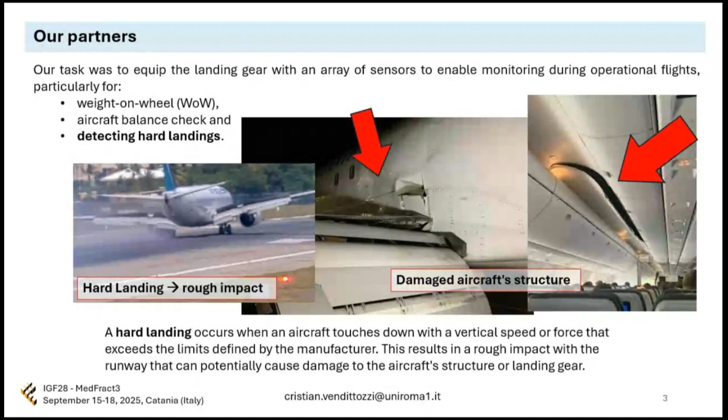The problem is that to date, there is no integrated avionic component that is capable of objectively monitoring whether a hard landing occurs or not. Usually, a company relies on the report delivered by the pilot, but at the same time, 90% of hard landings occur due to the wrong behavior of the pilot itself, so it can't be an objective relay.

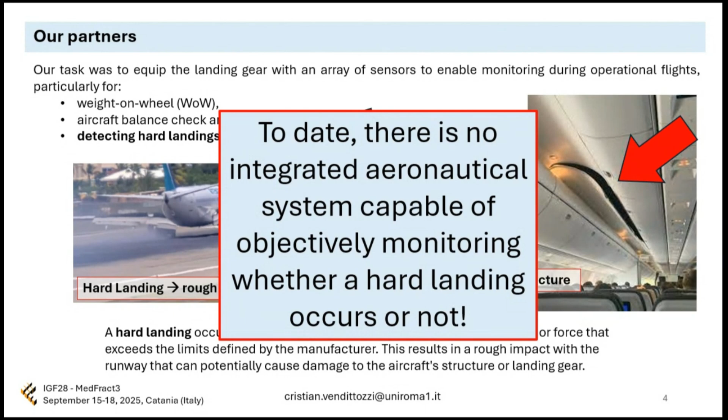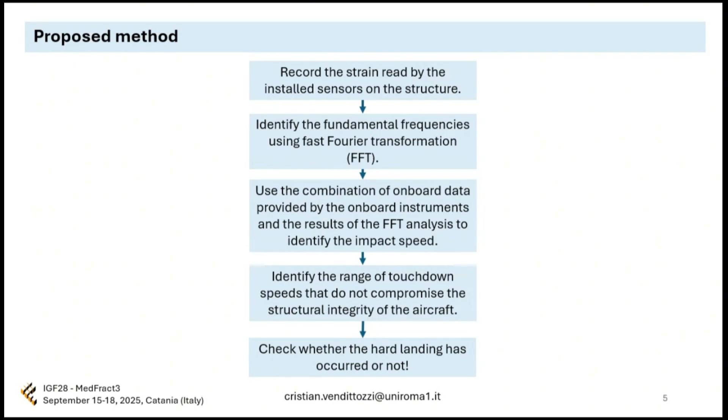This is the proposed method. The idea is to record the strain read by an installed set of sensors to identify the fundamental frequency by FFT, the fast Fourier transformation, use the combination of the onboard data provided by the avionics of the airplane or the helicopter, combine it with the results of the FFT analysis to identify the impact speed. Identify then the range of touchdown speeds that do not compromise the structural integrity of the aircraft, and then check whether the hard landing has occurred or not.

The second partner is the Corpo Nazionale dei Vigili del Fuoco. It means the national fire department. The test was performed in Ciampino Airport with the team of Daniele Tittoni.

Let me say that they participated in the project, giving us the chance to use the Sikorsky S-64. This helicopter is called S-64 because it entered operation in 1964. So it's a 60s design, a very old helicopter. The avionics, the onboard equipment, were renewed in the last few years, so the electronics are new, but the structure is a very old structure, an old concept. It was chosen just because, as you can see, it is a very distinctive structure, and it highlights the main landing gear, which is the component that we are going to test.

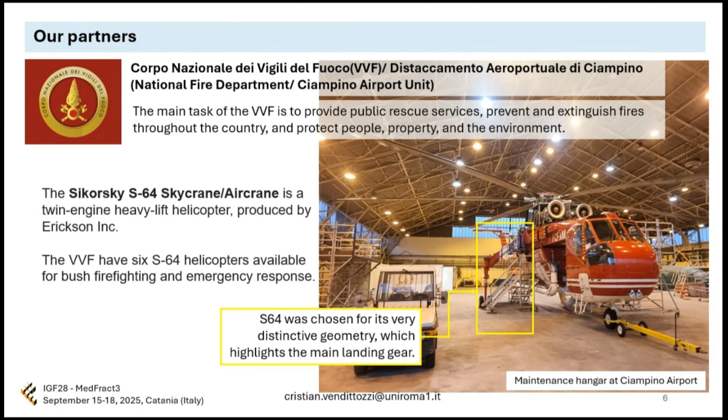What is our goal? Our objective is to verify what has already been proven in the lab works also on a real aircraft, a real helicopter, because we have performed in the last few years several tests on, let's say, a bench test in laboratory. The scope is to stress the full chain. The chain starts from the sensor, cabling, the interrogator, the data acquisition system, the processing, and the interpretation of the data under real operating conditions, okay?

What is our success? Our success is a successful flight, or better, to show that we can use our system during a real flight, capture usable signals, be capable of using the signals, and show plots that convince our partner the system is viable and worth continuing.

What does it mean, convince our partner? The Vigili del Fuoco are lending us a system, a helicopter, that has an average cost of more or less 20,000 euros per hour of operation. So each hour, they spend 20,000 euros. This is the reason why it's very hard to convince them. So this is a feasibility and transfer test, not a performance limit test. We are not looking at a number, okay?

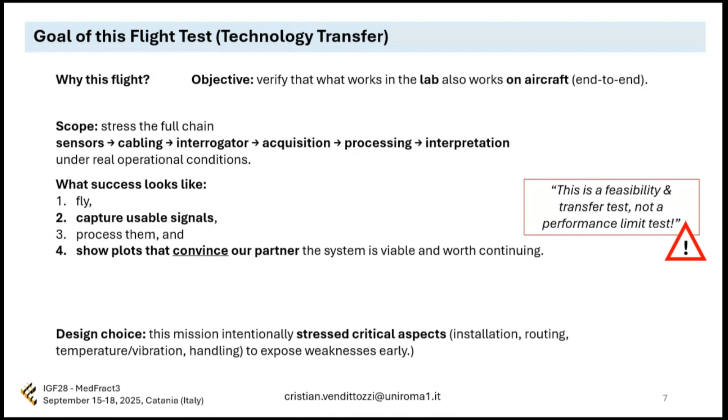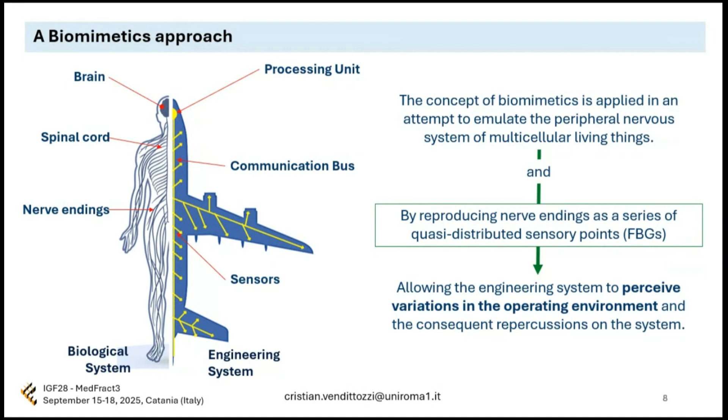There's an overall structure idea that is a biomimetic idea. Biomimetic is the attempt to emulate biological behavior. In this case, the concept of biomimetics is applied in an attempt to emulate the peripheral nervous system of multicellular living things. It means our plane, our aircraft, our helicopter must be thought of as the human body. The nerve endings must be the sensor, the spinal cord the communication bus, and then the brain the processing unit. It seems to us that the best sensor that fits this purpose are the fiber Bragg gratings.

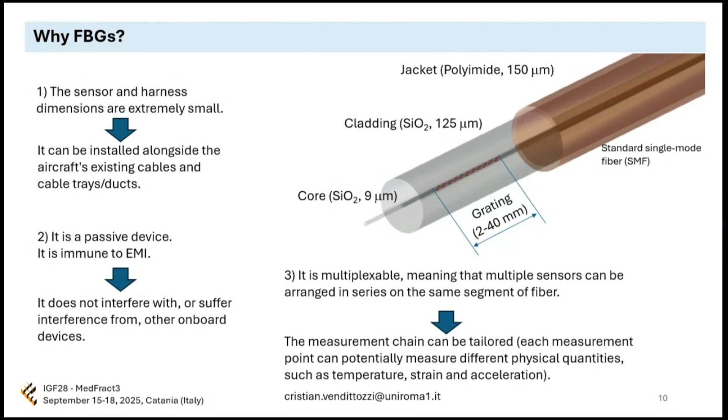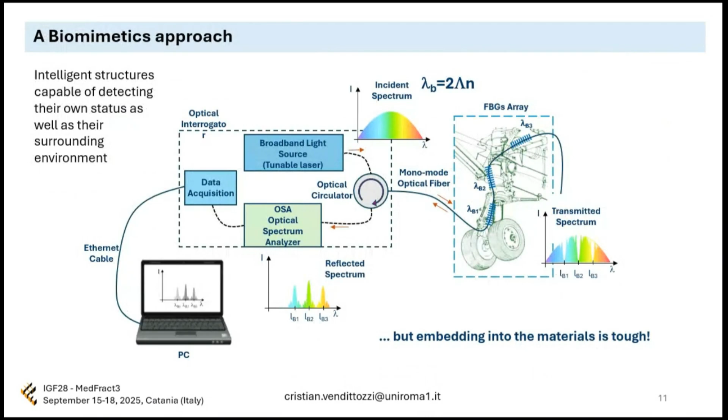The third point is the multiplexability. It means we can put many sensors on the same sensor chain. The measurement chain can be tailored, and each measurement point can potentially measure different physical quantities, such as temperature, strain, and acceleration. On the same fiber segment of a few meters, I can put several sensors occupying just one channel of the data acquisition system, and each point can measure a different quantity. So the idea is to develop an intelligent structure capable of detecting its own status and also what is happening in the operational environment.

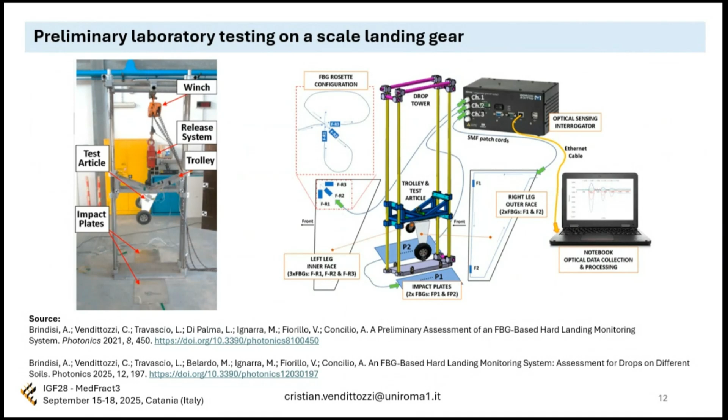We performed in the last few years several laboratory tests using a drop tower. One interesting point in studying hard landing is that scientists are trying to define the limit velocity that a structure can reach at impact. One value found in the literature is about 2 meters per second, but it depends on several factors, it depends on the structure, and it's only a vertical velocity. For this reason, we performed this kind of test, and we had some interesting results we're sharing in a publication.

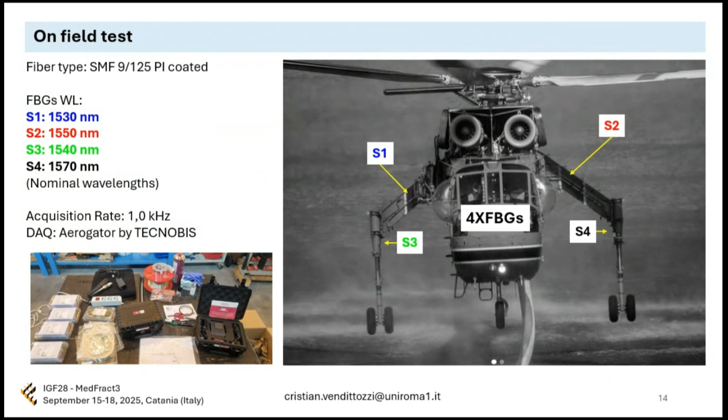This is the test I'm going to show you today. It's just the first test, a tentative test. We used 4 sensors at 4 different wavelengths. The sensors were bonded on the two legs: S1, the first sensor, on the right shoulder; S2, the second sensor, on the left one; then S3 and S4, the third and fourth sensor. We used the data acquisition system of TECNOBIS Aerogator, which is qualified for flight, with an acquisition rate of about 1 kilohertz. The Aerogator is capable of reaching 20 kilohertz, if I'm not mistaken. Here are a few pictures of the application, the test. The acquisition system was installed on the rear seat inside the cockpit.

I wasn't actually allowed to fly with them, unfortunately, so I was just present in the moment of the installation of the sensor. The fiber passes through the existing pass-through outside the fuselage of the helicopter, and just a picture to show how the FBG were installed.

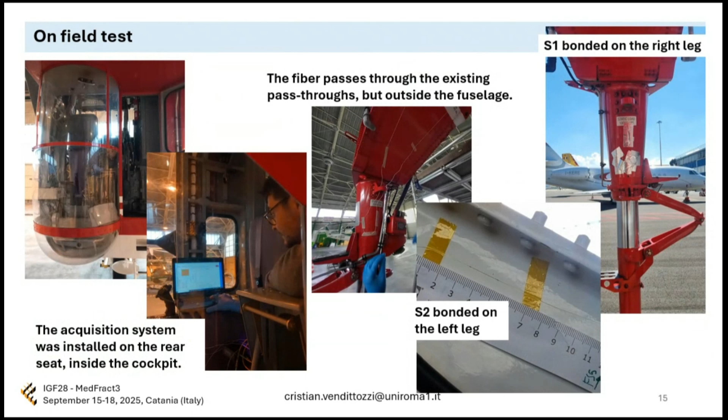Several conditions showed that it was not a proper installation. It was not, let me say, a textbook installation.

Usually when you install a strain gauge, a sensor that must measure the strain of a structure, you have to bond the sensor in very intimacy with the structure.

Okay, in this case, for who knows how aerospace paint works, understand that here we have something like 8 different layers of painting. So it's not the best condition for our sensor, but we weren't allowed to remove the paint.

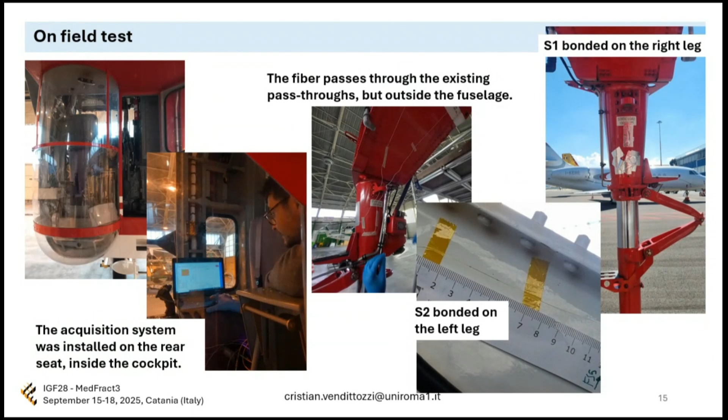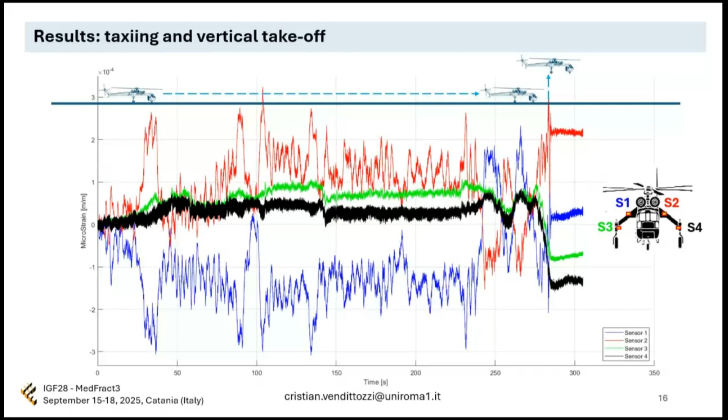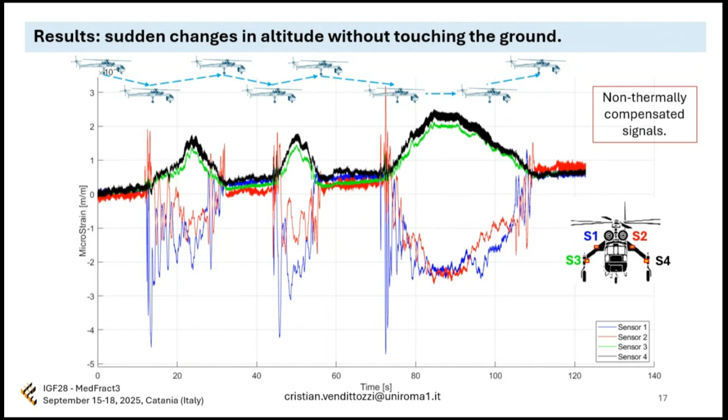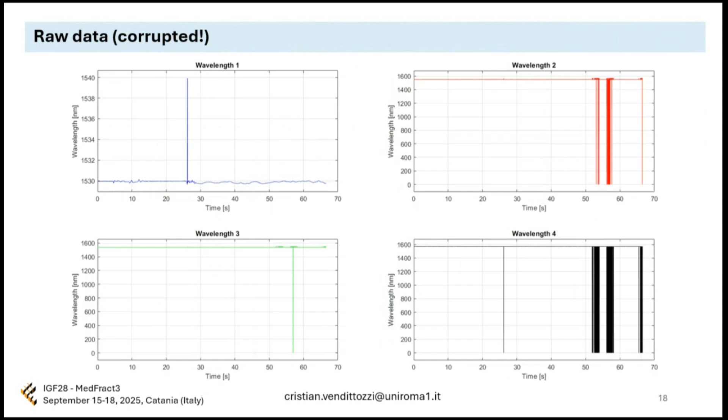This is one of the problems that we encountered. Our raw data were completely corrupted - no information can exit from this data. We had to develop a specific MATLAB code to clean up the corrupted data in order to reach this condition, and then combining them and normalizing the signal, we reach a good point.

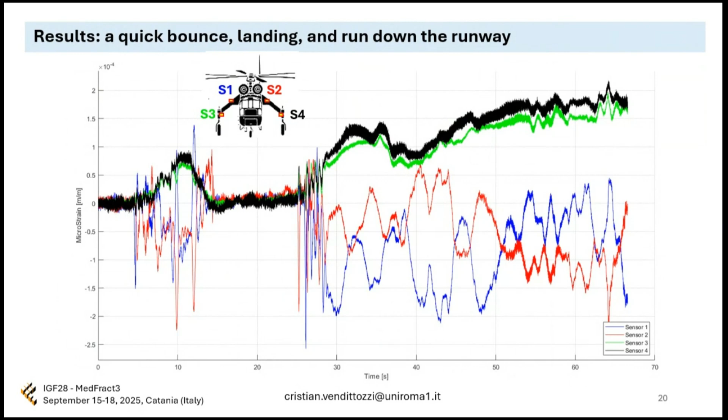Let me see what we have here. The first part shows the flying helicopter, then we had a sudden touchdown - we touched the soil very rapidly. And then take off again, flight, a harder touchdown, and then the run out along the runway.

When you talk about runway, you think of the plane, okay, the way of an airport. It wasn't like that - more close to the road of Rome in this moment, so full of, let me say, problems. Okay, so this was a problem for us to process for the interpretation of the data.

What we performed, following our method, starting from the time domain - here in the horizontal axis we have time. Using FFT analysis with a Hann-windowing method, all the frame in several windows, in order to identify the proper, let me say, fundamental frequency of each step.

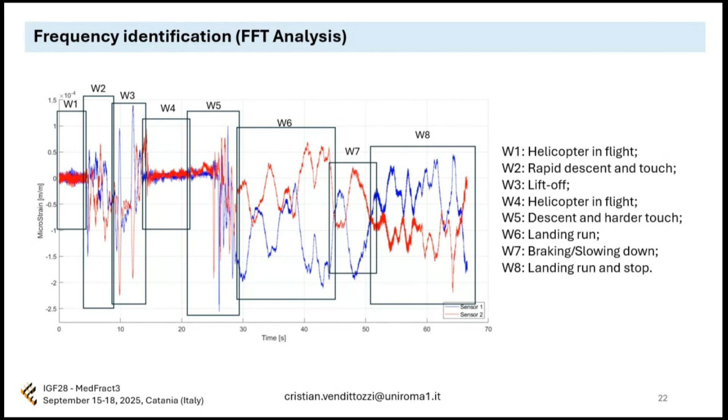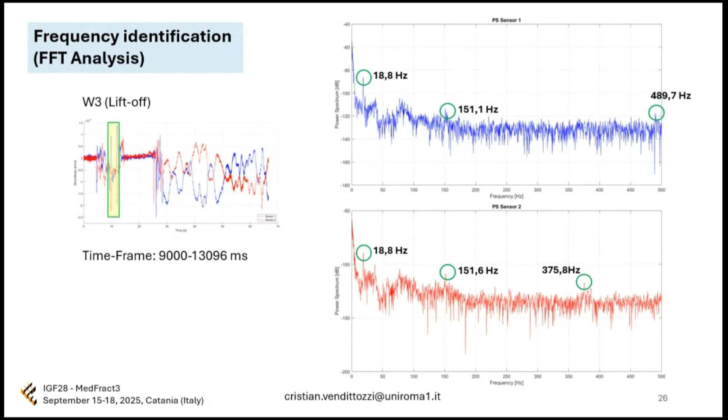So we have the helicopter in flight, etc. Let's go a bit further. Here is shown the family of frequencies, okay, that we, let me say, found in our analysis.

I don't want to waste our time. Here is a resume: a repeating spectral family is presented across window 1 to window 8, with lines that are approximately 19 hertz and integer multiples about half kilohertz.

Using, considering the, let me say, the fundamental frequency, and considering the actual speed, we can define what is the impact speed.

In this case it was very, very difficult because we have several problems. We found intermittent frequency at 9.2 hertz, about window 5, and in window 5, window 6 for the non-linear order content. We had a persistent band near 150 hertz, between 375 and 385.

More important, the last one: 491, 494 hertz. Behave like structural local resonance of the gear assembly, but we weren't able to understand exactly which was the source of this vibration, okay?

The FFT outcomes, anyway, that we observed on the helicopter match the laboratory pattern closely enough to validate the technology transfer and justify continuing the program.

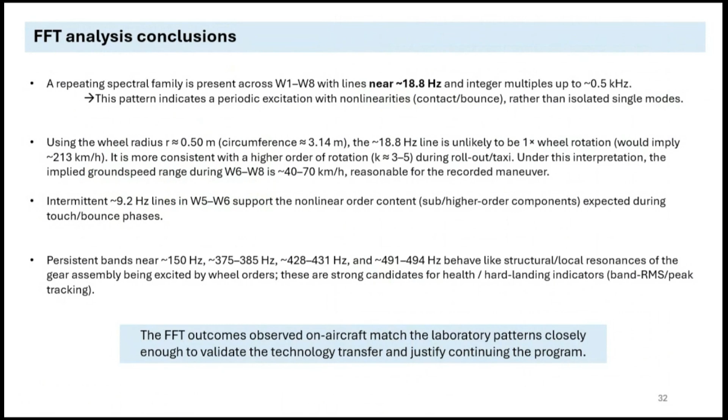Final remark: the work represents only a preliminary field test that allowed us to test a continuous and real-time monitoring system on the landing gear of a real helicopter. It means a system that must live all along the operational life of the helicopter itself, which had already been tested in the laboratory on a scale model.

The results were encouraging, despite the test being carried out under critical conditions. Did we achieve our goal? Let me say yes. The flight executed with sensor operation throughout key phases, usable data captured and processed, expected features observed, and let me say partner-facing plots produced that support continuation of the activity.